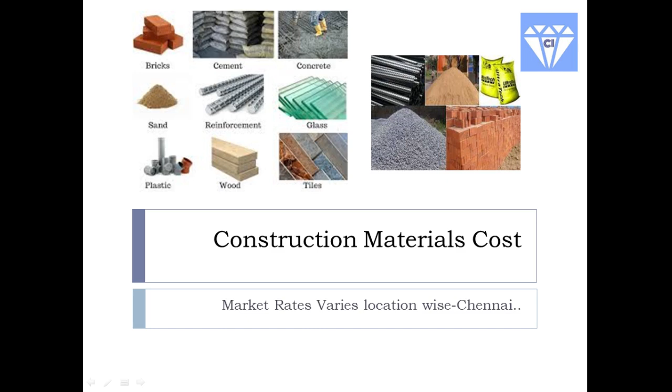Cement is the main part of construction work. Many cement brands are available, and it differs state to state due to state tax, district wise, and location wise. Many brands are there, even non-branded ones available. You can go for a branded one, choosing PPC or any cementitious product like PSC.

Slag cements you use will be a little lesser than normal OPC cement for house construction. Yes, for multi-storey projects, if required, they will go for OPC. For small house work, you can go for PPC.

This cement price is somewhere around 390 to 450. Due to the COVID situation, cement manufacturers increased the price recently by up to 20-30%. Earlier it was up to 330, now it has been increased to 390 to 450. This is the cement cost.

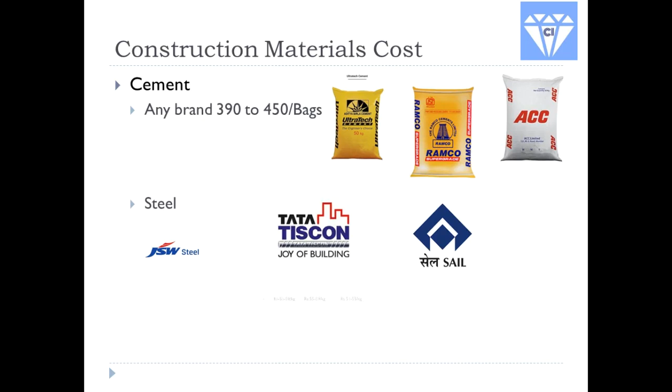And the next main part is steel. JSW, Tata, everything is available. Even local market price steel is available, which you can use, no issue. Please check the quality and refer with our structural engineers. You can go for local steels also.

Now I'm putting the steel rate of each brand wise, 55 to 59 kgs. It differs from 50 to 59. Three major brands are there, which charge this much per kg. You can get an idea about these things.

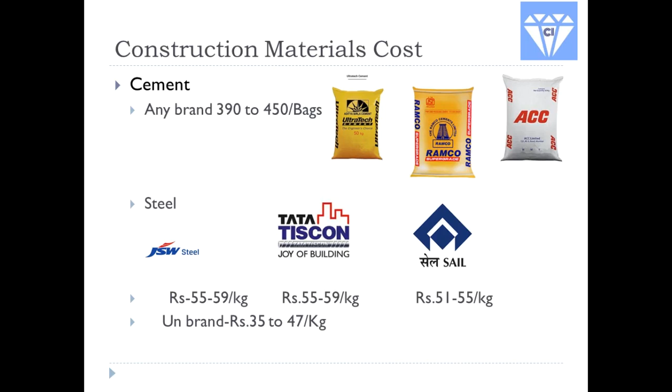Unbranded steel is somewhere around 35 to 47. It's also not the worst, for mid-range, mid-version, you can take for G plus one, for our own building works. You can go for any steel which meets our specification strength requirements.

Next, fine aggregates. Anything available, river sand, robo sand, manufactured sand, plaster sand, everything is there nowadays. In some areas river sand is banned by the government, like in Tamil Nadu, most areas.

Other areas have plenty available, but still you can go for whatever local sourced material. If nearby quarries are available, go for M sand. If river sand is very near, go for river sand, no issue. Whoever doesn't have river sand, go for M sand. That is the price we are putting here.

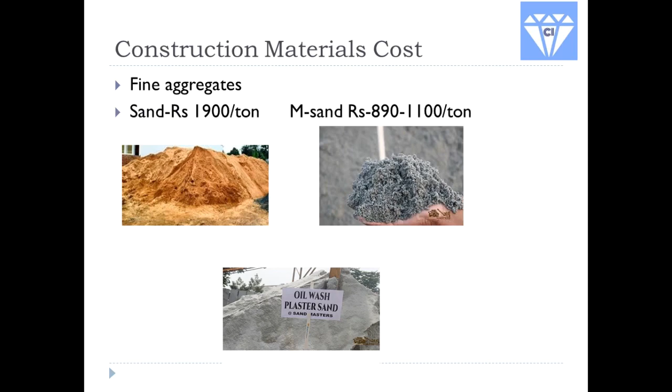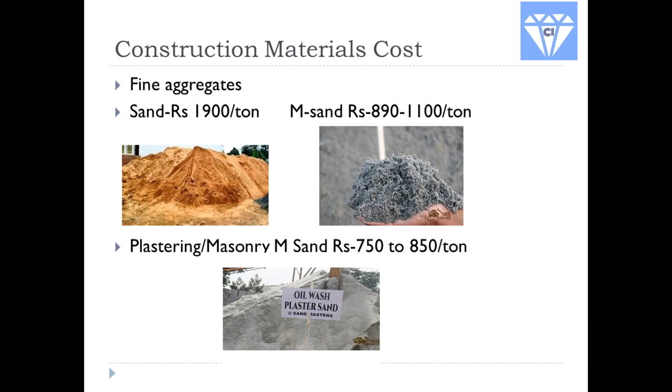Sand is almost 1900 per ton, and M sand is somewhere 50% of sand price, or if it's far from your project location it will be around 70% of sand cost, still 30% less. No issue. For plastering sand, you can see here 750 to 850, river sand 1900, M sand is 890 to 1100 per ton.

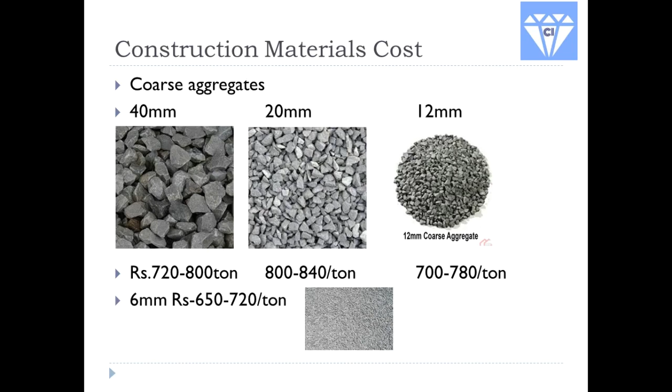Next is coarse material. We call it metal: 40mm, 20mm, 12mm, and the last one 6mm. This price also we are putting here. You see 720 to 800 for 40mm, 800 to 840 for 20mm per ton, 12mm is 700 to 780, and the final one 6mm is 650 to 720. Nowadays it's also available nearby at plants and quarries.

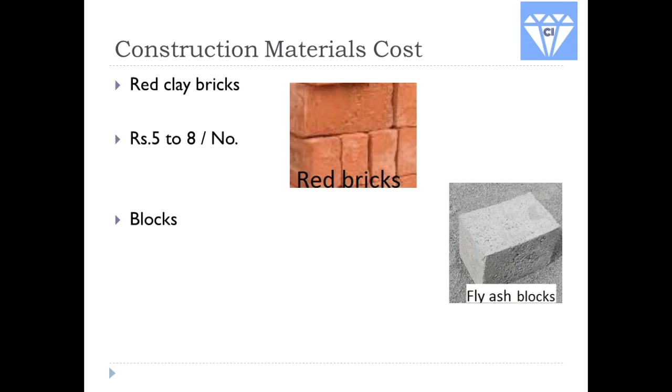And the next is red bricks. In village areas, it is very easy to get red bricks. Nowadays with technology improvement, fly ash bricks, AAC blocks, many blocks are available. We'll compare with this. The red bricks rate is somewhere around 5 to 8 rupees, so roughly 6.5 to 7 rupees you will get bricks.

For blocks, different sizes are there. To avoid joints, you can go for a bigger size. If you are framing the structure, you can close your eyes and buy any fly ash content blocks, they also have strength and minimize joints. Cement consumption will be less, and plastering also gets good grip. So everything will be fine with fly ash content material blocks.

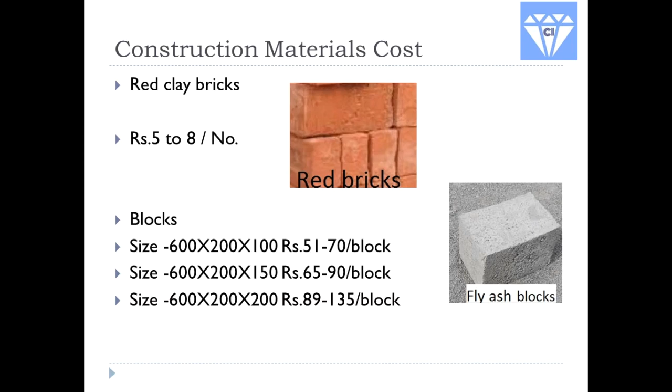These blocks are very economical. You can go for fly ash bricks instead of red clay bricks.

Next is ceramic tiles, meaning wall tiles, bathroom tiles, kitchen tiles. Those are available at the rate of 25 to 35 per square feet. Then next is floor tiles, starting from 45, 40, even 30 also available.

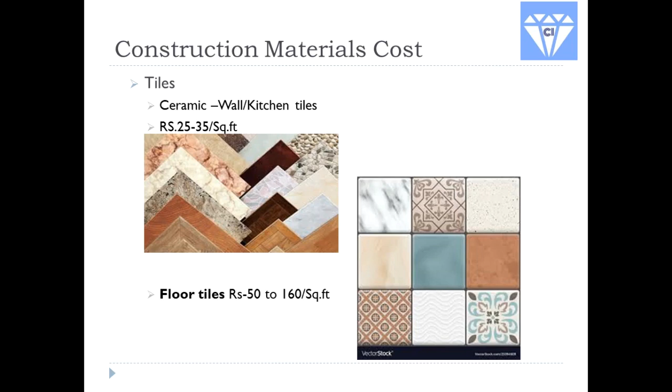Don't go for the lowest priced tiles, it may not be good for the life of the building. Go for a basic mid-range, at least 50 to 160 per square feet available. This much is not required, but you can go for 70, 60 price, 50 is also okay.

Next is ready mix concrete. It is available very near big cities only, or at least some cities. Nowadays these RMC plants are developing, extending their ranges to reach villages also. But I think for quality, distance and timing is the main important factor.

For RMC, you need to utilize the concrete within 2 hours. If 50 to 70 kilometers beyond the city limit, the transportation and traveling time itself takes 1 to 1.5 hours. After that, how will you use it within half an hour? It is very tough.

So you go for a local mixer machine with quality standard nominal mix or design mix, supervised by a supervisor or any engineer in presence. Mixture machine concrete will also be good, and the rate will be lesser than RMC. If you do it with the mixture machine, the quality will also be good.

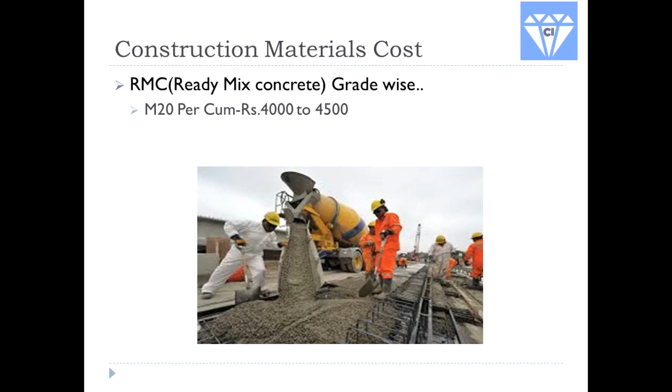We will be putting the RMC rate here. For M20 grade it is presently available at 4,000 to 4,500, M25 at 4,500 to 4,900, and M30 at 5,000 to 5,700.

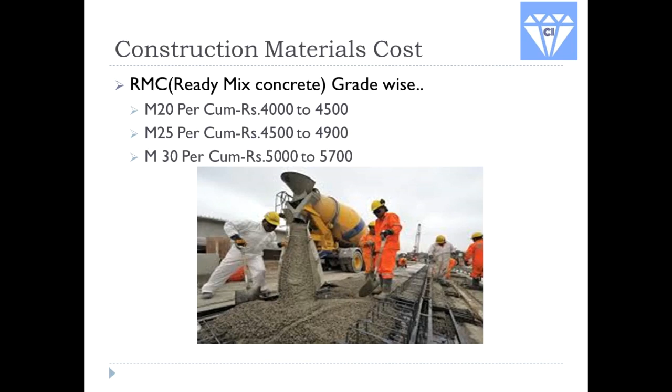If you have RMC facility nearby, go for RMC. It is completely controlled by mechanism, so the product will have excellent strength, and they will be proving it. So go for RMC. If you're not having RMC, go for mixture machines.

Next, windows are available due to technology development. These UPVC frames are coming, which are termite free with life warranty, everything they are giving. So you can go for UPVC. It's a little bit costly, but look-wise, aesthetic-wise, everything is excellent.

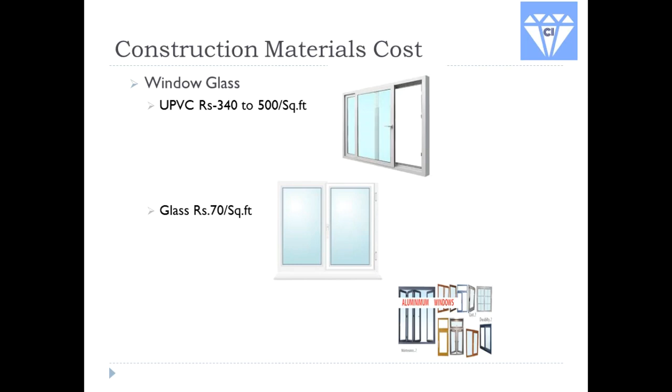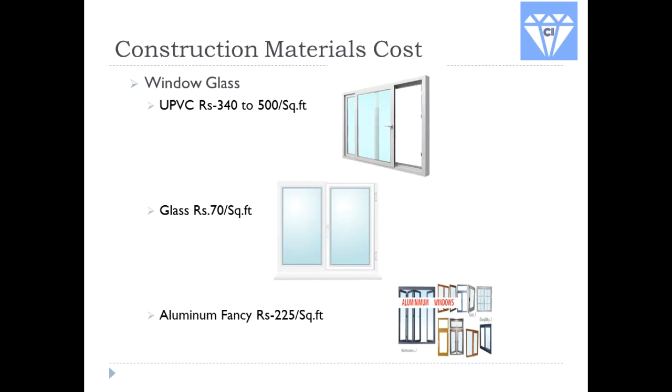The price of UPVC is 340 to 500 and more, this range is available, you can go for UPVC. Then our aesthetic normal glass range windows are there, somewhere 70 rupees per square feet. And aluminum fancy options are 225 per square feet.

Next is plywood. Plywood again differs thickness wise. For kitchen works you should go for fire rated plywoods. For any other cupboard works, no fire rating is required, so you can balance the rest as okay.

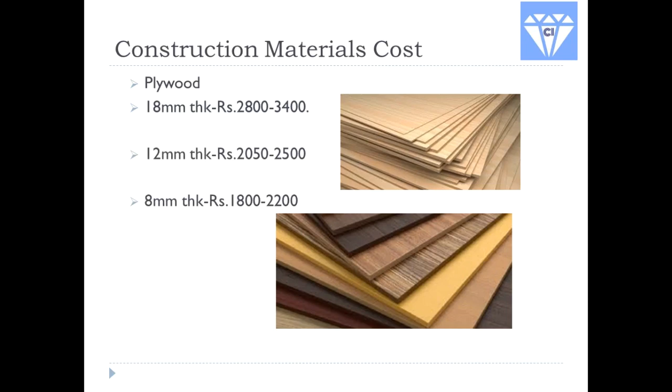18mm thick is somewhere around 2,800 to 3,400, 12mm is 2,000 to 2,500, and 8mm is 1,800 to 2,200. This is the plywood price. You can use it for all doors, cupboard doors, and woodwork inside.

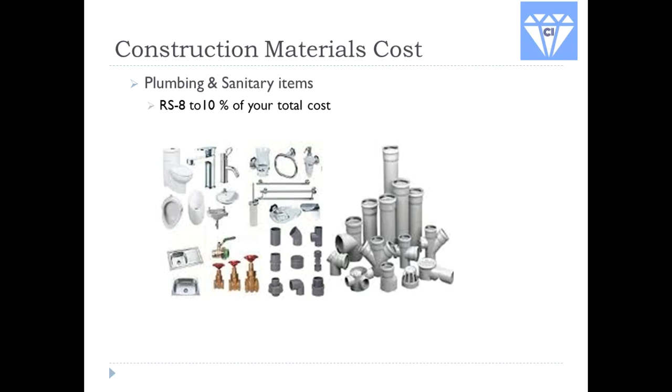Next is plumbing and sanitary items. Instead of going into rate, you can subdivide it into total project cost: 6% will be the plumbing cost and 4% will be the sanitary cost. For our entire project cost, if you derive 10 lakhs as the building cost, then 1 lakh will be around the plumbing and sanitary items price. That's the way we are putting the total cost here.

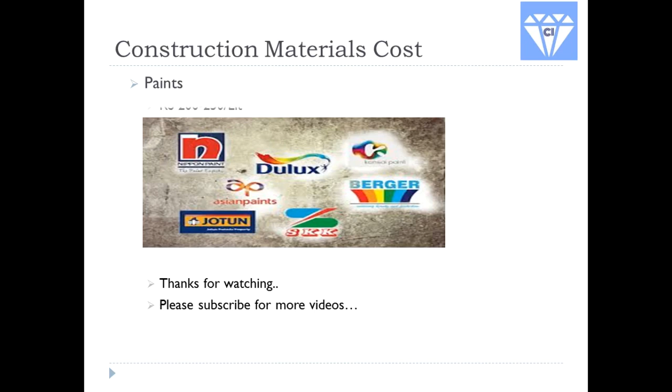Next is paint. Many brands are available. Based on our priority or interest, we can go for exterior, texture paint, 2mm thick, 1mm thick, synthetic, many varieties are available. So check with the manufacturer and buy it, no issue. The prices are somewhere around 200 to 250 per liter starting, even 150 also available. Basic range is 150, you can go at least 200 so they give some warranty.

If you want to claim a warranty, you apply with the applicator that the manufacturer recommends, then they will do it in their own way, and only then will they give a warranty. We cannot claim that we applied paint and ask why it is not staying for 5 or 7 years, because they will question whether you applied a standard procedure. So those are all catchy words only. Better you go for a mid-range, at least mid version, then it will be good for all interior exterior paints.

Even nowadays waterproofing paints are also available, so you can check with your nearby vendors. This is what we wanted to tell.